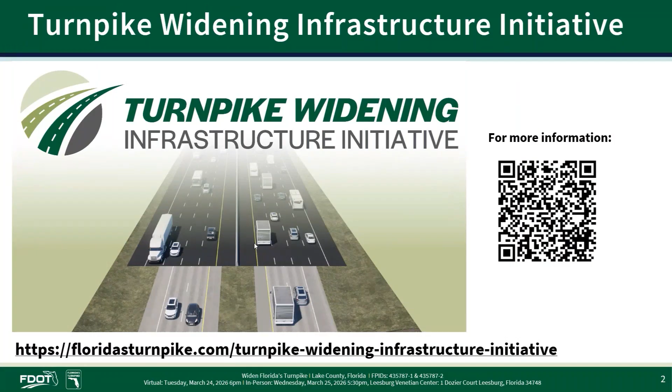To support this effort, the enterprise is accelerating and delivering several widening projects under this initiative. To learn more, please visit the Florida's Turnpike Widening Infrastructure Initiative website at floridasturnpike.com/turnpike-widening-infrastructure-initiative. This project is being developed in accordance with the Civil Rights Act of 1964 and related statutes.

Under Title VI of the Civil Rights Act, public participation is solicited without regard to race, color, national origin, age, sex, religion, disability, or family status. If you have any questions or concerns, please contact Desiree Stills at 407-264-3111 or Lisa Bethencourt at 850-414-4742.

The enterprise follows the FDOT's project development process for delivering needed infrastructure improvements. The phases include planning, project development and environment, or PD&E study, design, right-of-way acquisition, and construction. We are currently in the final design phase, and the right-of-way acquisition phase has begun.

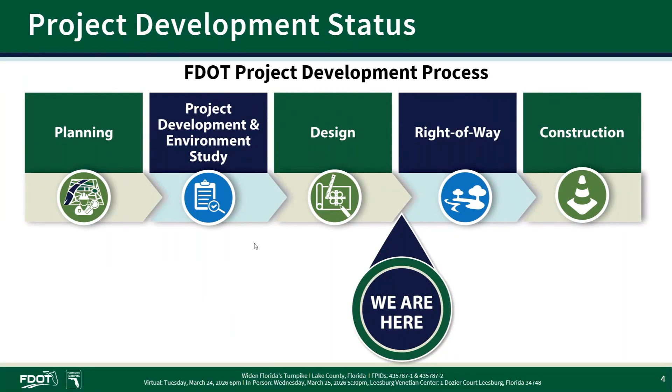The enterprise completed an environmental document as part of the 2016 PD&E study. The enterprise is undertaking a reevaluation to confirm and update original findings in compliance with applicable laws and regulations. The reevaluation includes updating supporting environmental activities, studies, and/or documents, including the Cultural Resource Assessment Survey, Contamination Screening Evaluation Report, Noise Study Report, Environmental Permitting, and Protected Species Surveys. The enterprise is honoring the environmental commitments that were made in the PD&E study phase, and agency coordination will continue through future project phases as necessary.

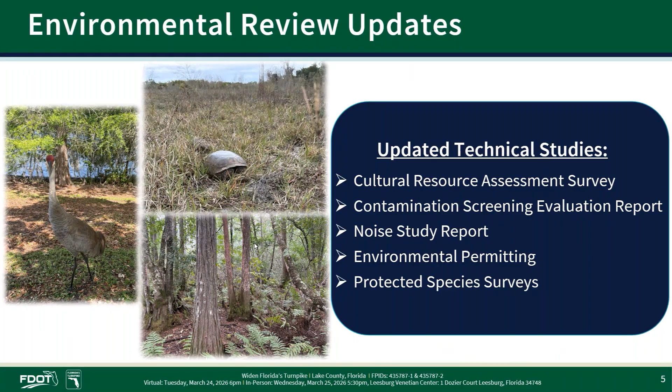This project video presentation covers the following: existing configurations, proposed improvements, FDOT's noise wall policy, project schedule, and outdoor advertising regulations compliance.

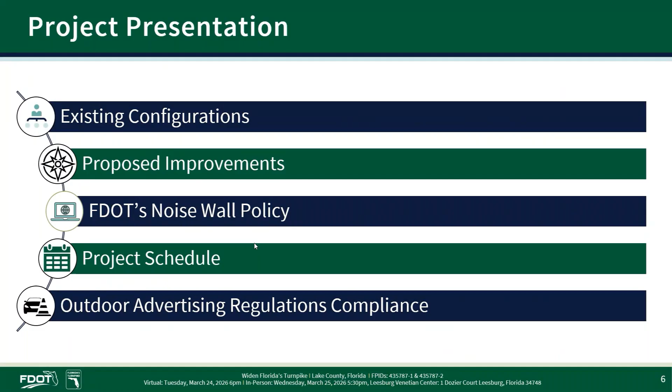The 8-mile widening of Florida's Turnpike from 4 to 8 lanes is along the Florida's Turnpike, or State Road 91, from the US 27 interchange to the County Road 470 interchange in Lake County.

The widening will provide additional capacity to meet future traffic demand, improve emergency evacuation times, and improve safety within the corridor. The widening is divided into 2 construction projects, shown in blue and green, referred to as South and North respectively. The first project to the south will extend from the US 27 interchange to north of County Road 33.

Then the North project begins north of County Road 33 and extends to the County Road 470 interchange. In this 8-mile segment, there are 5 bridge crossings: 2 mainline crossings over the Palatlakaha River and County Road 48, and 3 side roads that span over the Florida's Turnpike: Bridges Road, County Road 33, and County Road 470.

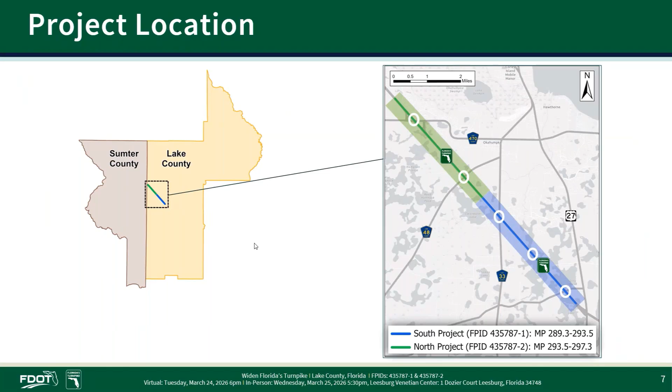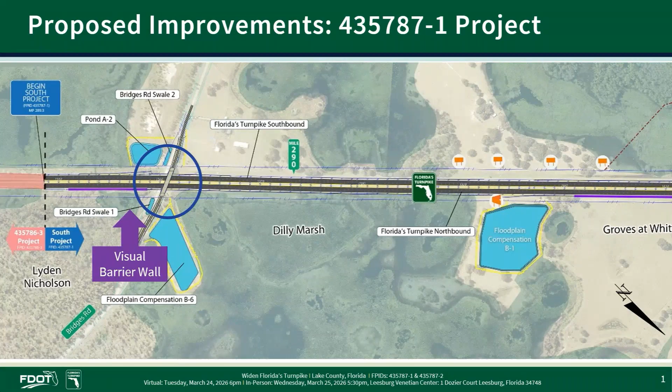This is an aerial view of the South project. Please note that north is facing downward. The South project begins just north of US 27 and includes widening the Florida's Turnpike from 4 to 8 lanes across the entire 4.2-mile segment.

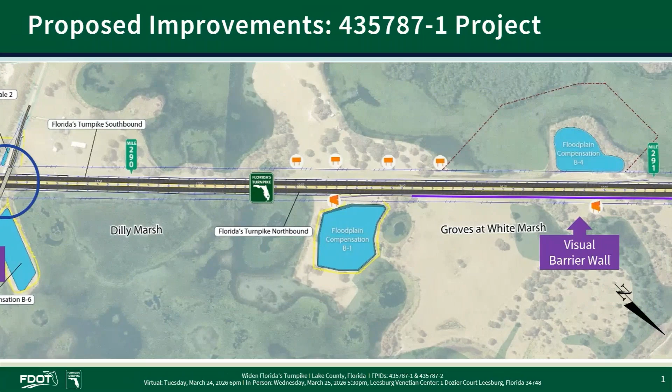It includes realignment of Bridges Road to the west and replacement of the Bridges Road Bridge over Florida's Turnpike, replacing the bridge over the Palatlakaha River, and the realignment of County Road 33 to the east and replacement of the County Road 33 bridge over Florida's Turnpike.

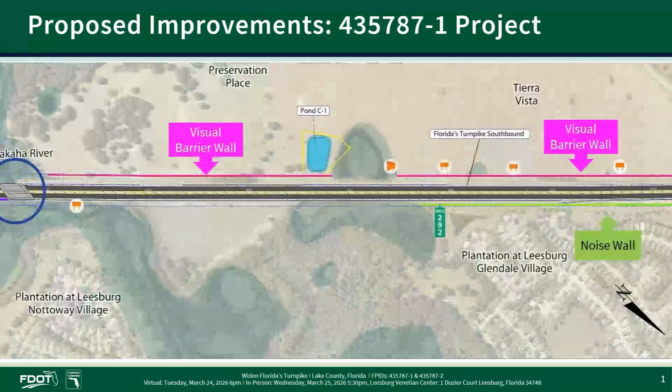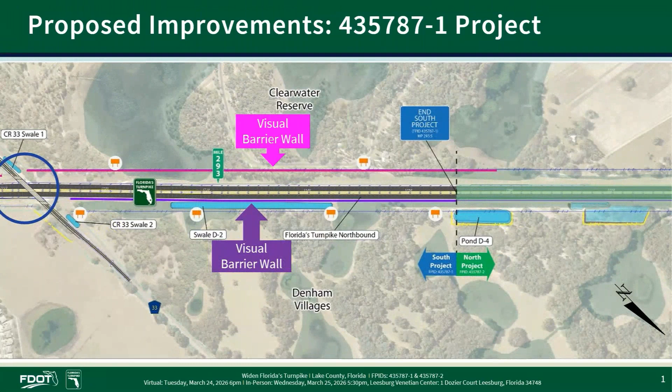Visual barrier walls and noise walls are proposed at locations shown on the exhibits. These proposed improvements are shown on the larger project mapping found on the project website and in the exhibit room.

The North project is 3.8 miles and continues the widening of the northbound and southbound travel lanes just north of County Road 33. The North project includes replacement of the Florida's Turnpike Bridge over County Road 48.

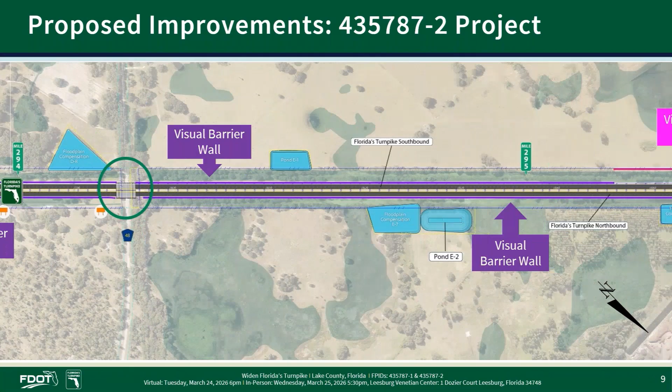The project ends at the County Road 470 interchange, where no changes to the existing bridge or roadway approaches are proposed. In this area, portions of the ramps will be reconstructed, including rebuilding them where necessary to tie into the existing ramps.

Visual barrier walls are proposed at locations shown on the exhibits. These proposed improvements are shown on the larger project mapping found on the project website and in the exhibit room.

Other elements for the South and North projects include drainage improvements, such as stormwater ponds and culvert extensions, intelligent transportation systems, or ITS, retaining walls, signing and pavement markings, and lighting.

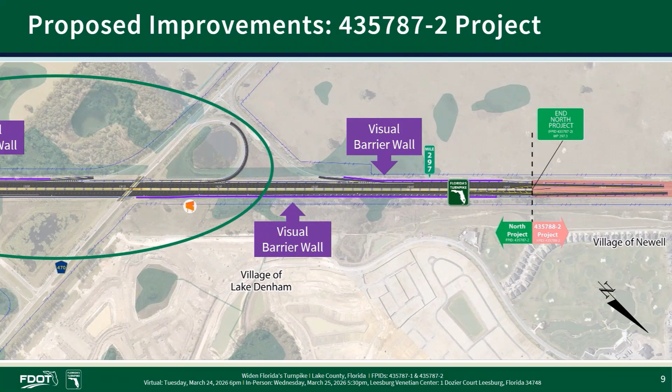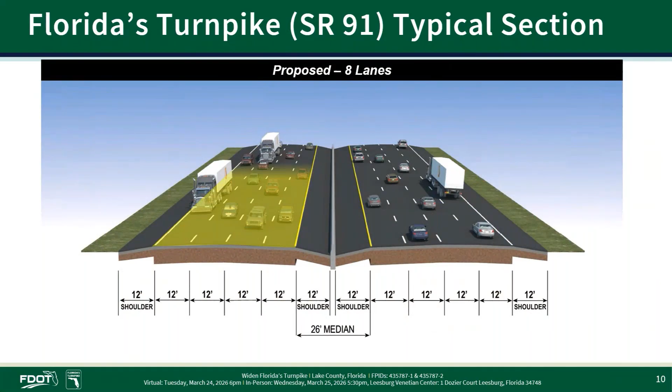The proposed improvements to Florida's Turnpike involve widening the existing 4-lane roadway to 8 lanes. The new typical section will include 8 12-foot travel lanes, 4 in each direction, 12-foot outside paved shoulders in each direction, and 12-foot inside paved shoulders in each direction.

Most of the project improvements will take place within the existing right-of-way.

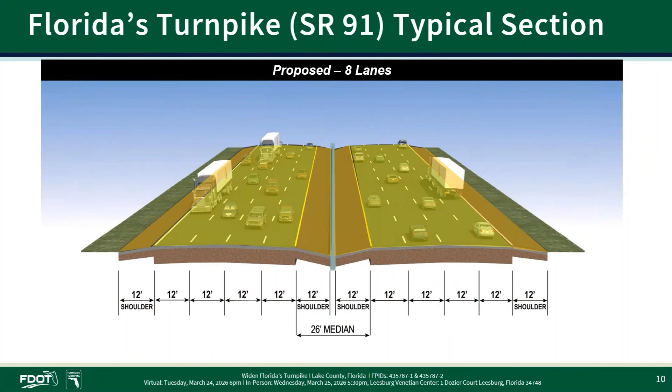The first crossing is the Bridges Road overpass, which will be realigned to the west and replaced with a new structure spanning the widened 8-lane Florida's Turnpike and providing 8-foot shoulders on both sides.

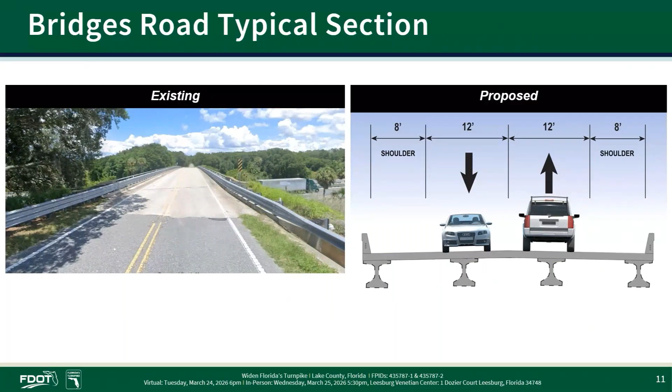The next crossing is the County Road 33 overpass, which will be realigned to the east and replaced with a new structure spanning the widened 8-lane Florida's Turnpike and providing 10-foot shoulders on both sides.

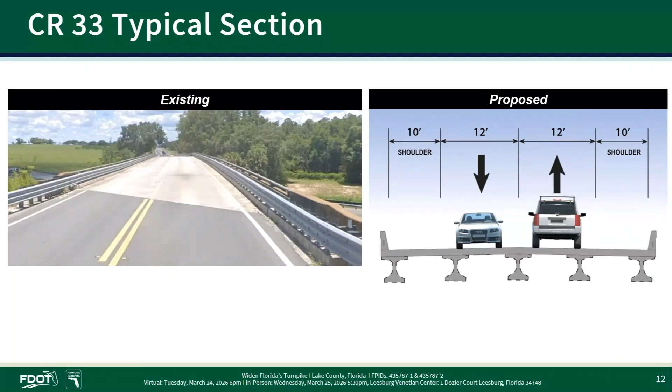The following fly-through excerpts include a virtual drive along portions of the project to help visualize the proposed Florida's Turnpike widening and other project elements. The fly-through overlays the proposed improvements onto the existing roadway configuration to show how the additional lanes will fit within the corridor.

This fly-through is of the Bridges Road area located in the South Project traveling north. The new bridge over the Florida's Turnpike will be shifted to the west side of the existing bridge. As seen here, the replacement bridge accommodates 2 lanes.

Please note that this is intended to help show how the proposed changes will look and may evolve as design progresses.

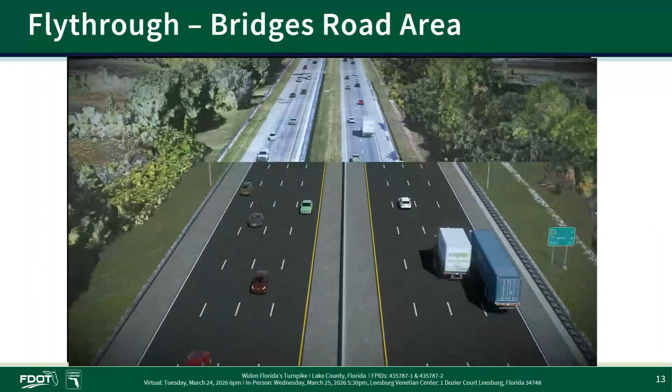This fly-through is of the County Road 33 area traveling north, beginning south of the County Road 33 bridge over Florida's Turnpike. As seen here, some areas along the project corridor will include a visual barrier wall or a noise wall on one or both sides of Florida's Turnpike.

These walls will either be shoulder-mounted or placed along the right-of-way boundary. Visual barrier walls and noise walls are proposed at locations shown on the exhibits. The proposed locations shown here are also included on the larger project mapping found on the project website and in the exhibit room.

The new bridge over the Florida's Turnpike will be shifted to the east side of the existing bridge. The replacement bridge accommodates 2 lanes.

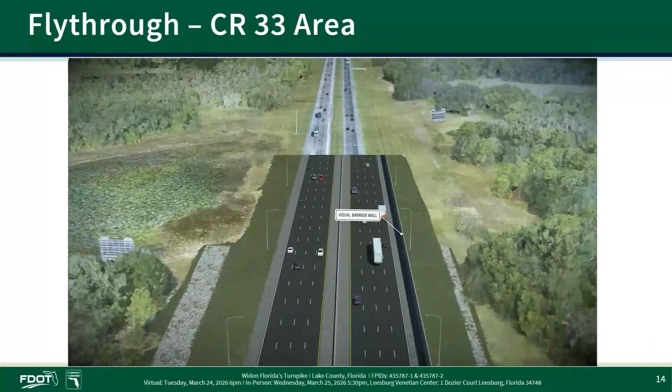Proposed pond locations, such as the one shown here adjacent to Florida's Turnpike, are also included on the larger project mapping. Again, please note that this is intended to illustrate how the proposed improvements may look and is subject to refinement as design progresses.

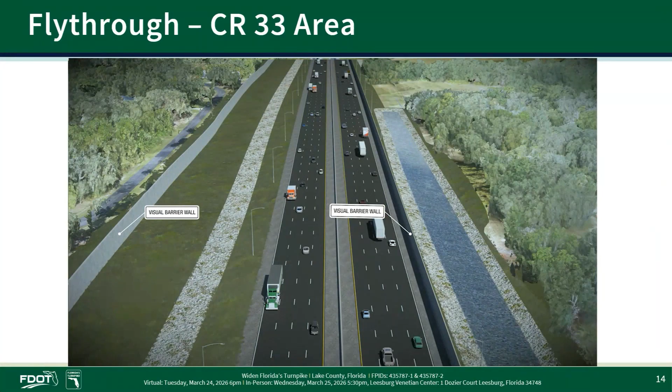This fly-through depicts the North Project as it approaches the County Road 470 interchange near the project terminus.

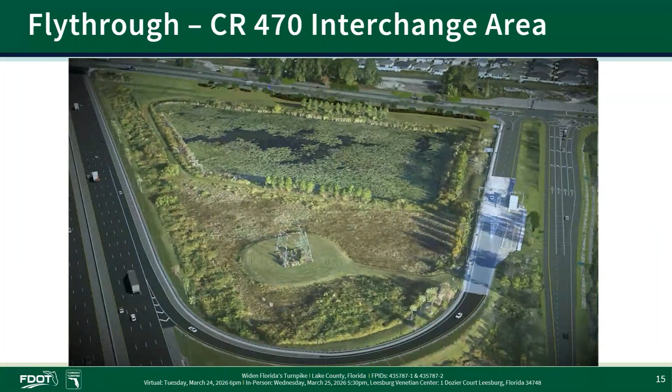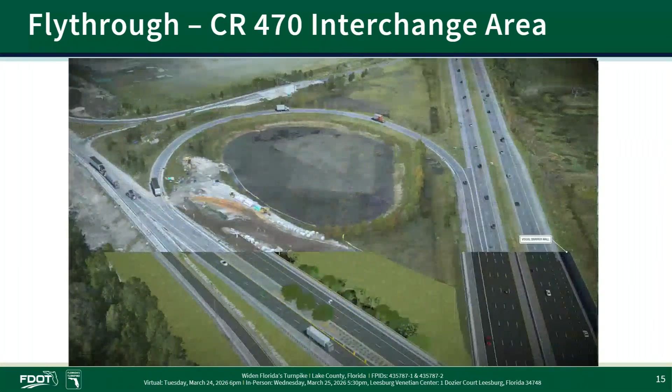At the project terminus, County Road 470 spans over Florida's Turnpike. The proposed design accommodates the ongoing improvements to County Road 470. In this area, portions of the ramps will be reconstructed, including rebuilding them where necessary to tie into the existing ramps. Please note that this is intended to illustrate how the proposed improvements may look and is subject to refinement as design progresses.

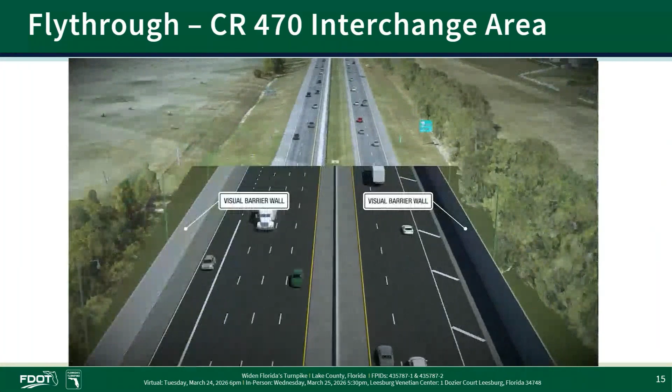A noise wall was found reasonable and feasible during the PD&E study phase in the area south of County Road 33, adjacent to Glendale Village. Noise studies conducted during the PD&E phase are reevaluated during final design.

All noise evaluations are carried out in accordance with FDOT policy, which is based on state and federal regulations. For noise walls to be included in design plans, they must meet FDOT acoustic criteria and must be constructible. More information regarding FDOT's noise evaluation process can be found at the YouTube link shown here and can also be accessed from the project website.

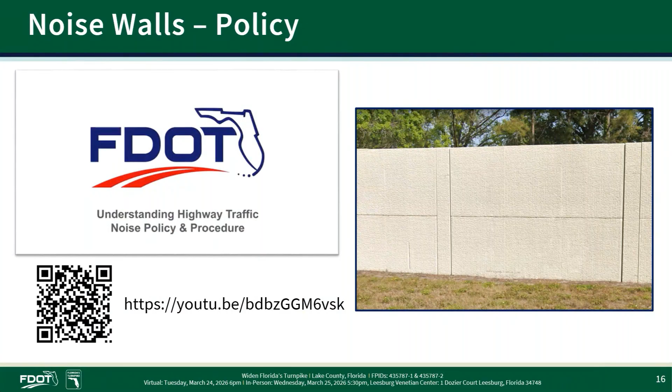The real estate acquisition has begun and affected property owners will be contacted. For more information, please visit FDOT's right-of-way website at https://www.fdot.gov/right-of-way.

Safety is a top priority during construction. Work zones are set up to protect both workers and the traveling public while minimizing changes to traffic patterns. Travel lanes will remain open during peak periods, with occasional nighttime lane closures and detours used to support specific construction activities.

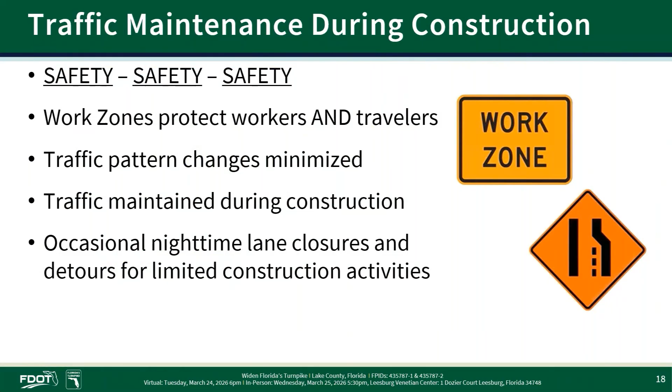When the project reaches the construction phase, signage will be placed to inform drivers of detours before work begins. The project team will continue coordinating with local agencies, businesses, and the public during project construction through the project website, email, and newsletters.

Outdoor advertising signs are located within the project corridor. In compliance with Florida Statute 479.25, this hearing is also being held to receive input on the proposed noise walls and potential conflicts with local ordinance or land development regulations.

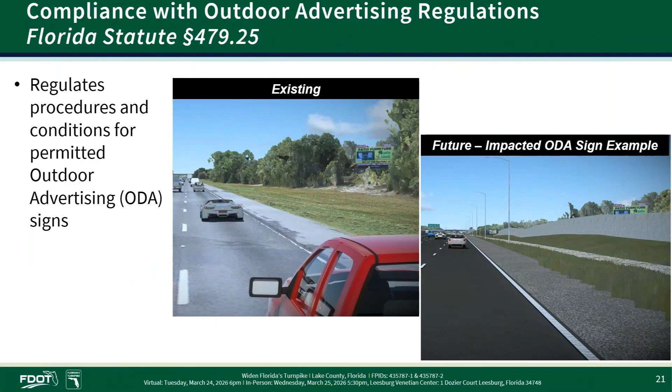Your comments are essential to this process and will help the enterprise understand your concerns and suggestions for improvements. We encourage you to provide a written comment or submit your comments directly through the project website. If you prefer, you may mail your comments or submit by email to the project manager, Pam Nago, or Community Outreach Coordinator, Fiorella Teodista. We would appreciate your written comments by Friday, April 3rd, 2026. Please note that all questions and comments received related to this project will also receive a written response.